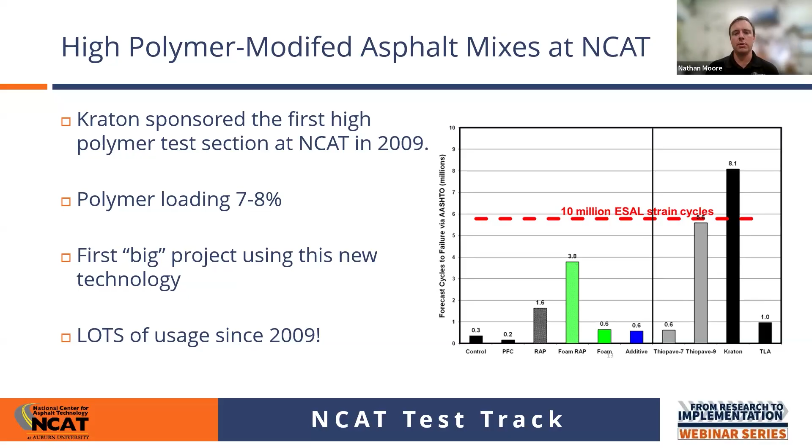We have used the high polymer modified mixes a ton since 2009. Sometimes in rehabilitation, other times in big group experiments to prevent bottom-up fatigue cracking and force top-down cracking. Other times just to build perpetual pavements for surface evaluation and all kinds of stuff. So really, the usage of this technology is pretty prevalent at this point, and not even just at NCAT, really across the country.

Some big lessons learned. What you'll find when you start using this material is watching your binder viscosity is critical. This stuff does tend to be stiffer than normal, so paying attention to that is really helpful. But the fact that the polymer loadings have come down just a little bit makes it easier to pump, and there's also a lot more technology that people who are smart about binder could tell you to help make it easier to pump.

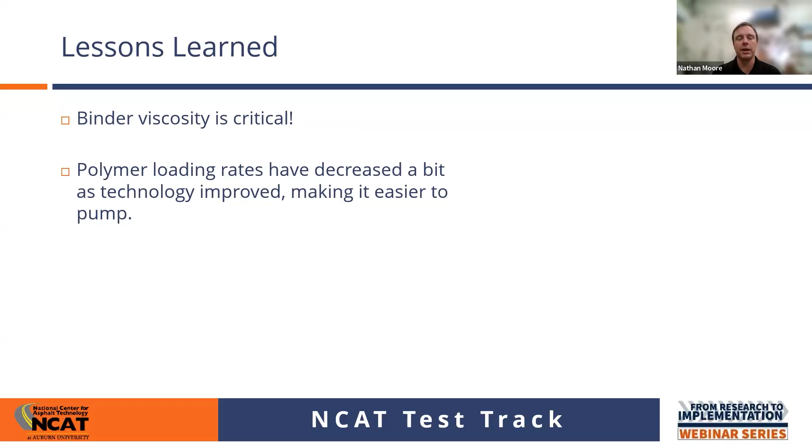Really, the big thing, though, in my opinion, one of the biggest lessons learned, and what we are trying to participate in the conversation to get the word out, is that these products significantly improve structural quality compared to conventional asphalt mixes. You don't need this stuff everywhere. But if you start to dig into the details about how these high polymer mixes work and how they impact structural coefficients or ME transfer functions, it's just quite remarkable.

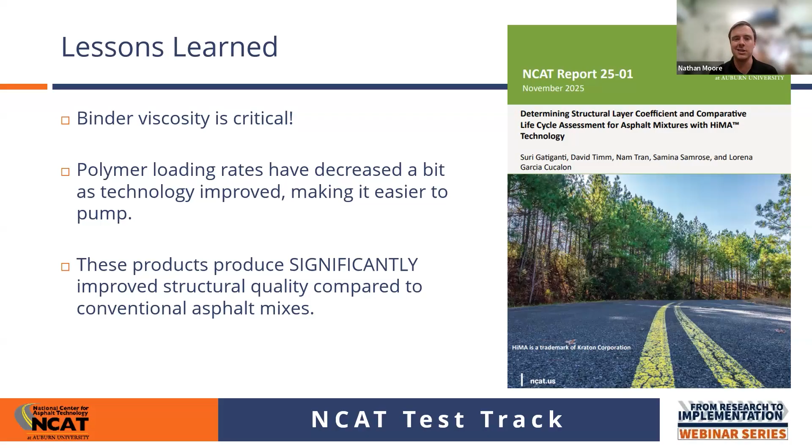This is just a screenshot of the NCAT report 25-01, where Suri Gatiganti, Dave Timm, and Nam Tran, and then one of their graduate students, Samina, wrote a report looking at structural layer coefficient recalibration using this product. So Nam's going to talk a lot more about this and some of the stuff that went into this report. So Nam, take it away. I'm going to turn it over to you.

Thank you very much for filling the space for me, because for some reason I couldn't find the button to share my screen. And again, thank you all very much for joining the webinar today. It is really a pleasure and also an honor to talk with Nathan. He has done a lot of work in the area of high polymer-modified asphalt.

In this presentation, I will focus on one thing, and the main question is how much better high polymer-modified asphalt performs than conventional dense-graded mix. What I'm going to do is summarize the field performance on several experiments at the test track, and then also look at the structural analysis for this experiment done by Dr. David Timm and his group.

In the slides that maybe we can share later on, we also have some information about the life cycle assessment done by Dr. Gatiganti. But for the limit of time today, I'm not going to present that part. And last but not least, I have an example of field implementation done by Oklahoma DOT based on the test results from the test track.

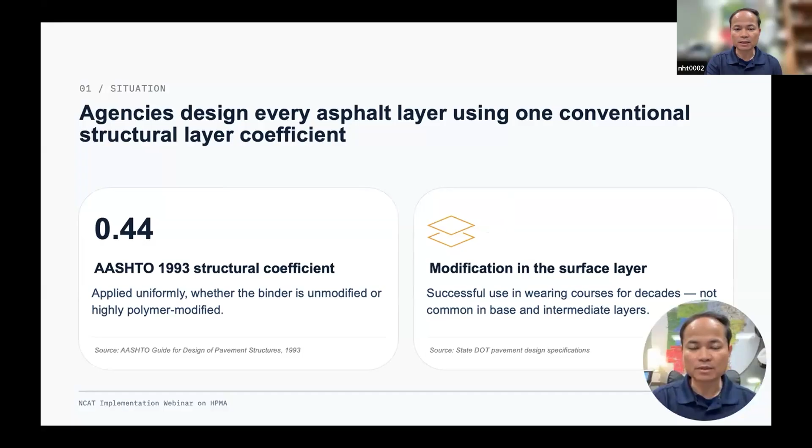However, it's not common to use polymer-modified asphalt in the base and intermediate layers. That really creates a gap between the current design practice and the actual field performance of that mix, and I'm going to talk more about that based on the experiment at the test track. So for the reason I stated before, the current pavement design practice does not fully take into account HPMA, the high polymer modified asphalt performance.

The NCAT track sections have shown better resistance to rutting and fatigue cracking than conventional control sections, and this was true even when the HPMA section was built thinner. But if you do structural analysis and look at the lab data, considering stiffness only, the stiffness of HPMA is not much different compared to conventional polymer modified asphalt.

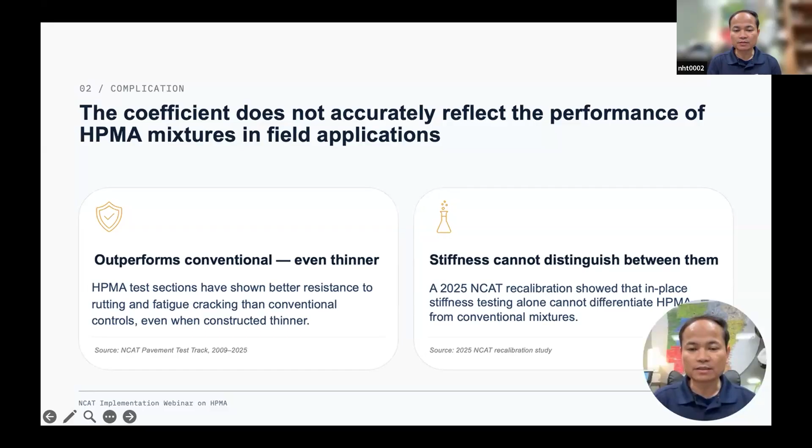So what we would like to highlight here is that if you would like to take credit for the HPMA, you probably need a calibrated design coefficient, or a way to take into account HPMA's resistance to cracking in the design procedure.

So all of that leads to the main question for this presentation: should HPMA mixtures receive a higher structural layer coefficient, or should that section be built thinner? And the answer is yes. If that answer is yes, what evidence do we have to support that recommendation?

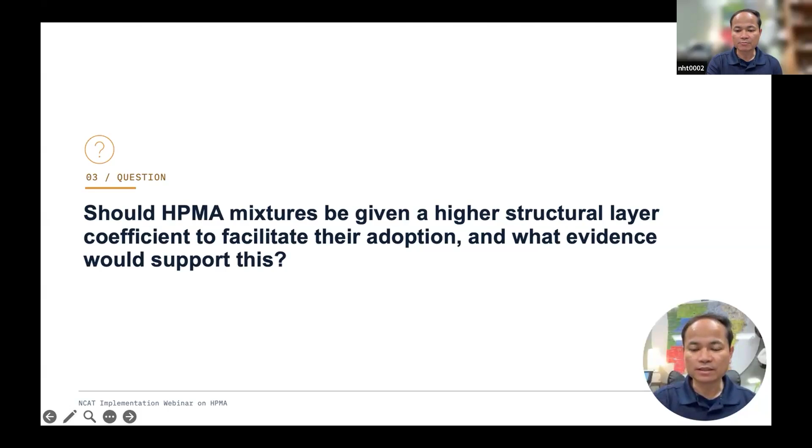The rest of the presentation will try to answer this question using the test track data, including the bending beam fatigue test in the lab, and we also have an example of implementation in the field for you.

So the short answer to the question earlier is yes, you can build the section thinner and apply a higher structural layer coefficient. The number I've shown here is that the layer coefficient typically used is maybe 0.44 in the 1993 pavement design guide, or in the case of Alabama DOT, they use 0.54 for the structural layer of conventional asphalt mixture.

Now, when we did all the analysis, published in the NCAT report 25-01 that Nathan mentioned earlier, we found that the layer coefficient for HPMA can be as high as 0.92, and the lowest number we found would be 0.75.

Now why do we have those two numbers? That is based on the conversion using 0.44 for conventional asphalt mixture, or 0.54 for conventional asphalt mixture. I'll talk about that later on.

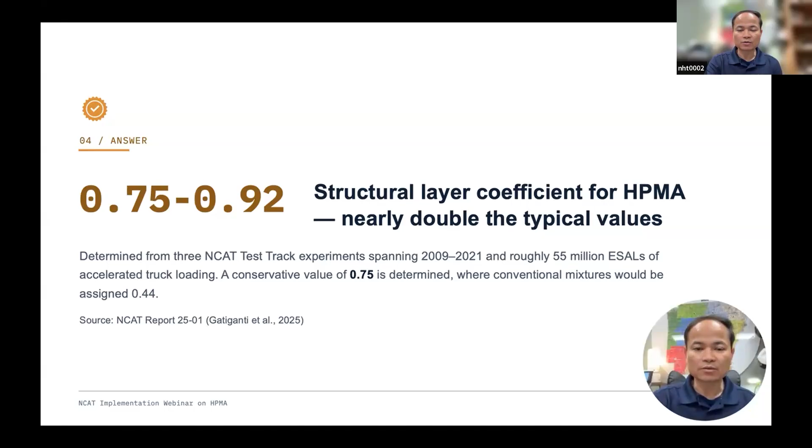One thing I would like to point out is that these values are based on several NCAT test track experiments, and the combined traffic for those experiments is about 55 million ESALs, starting from 2009 all the way to 2021.

So there are four research and implementation efforts that I have in this set of slides, but what I'm going to go through would be evidence number one: the field performance on the test track. The next one would be the structural analysis done by Dr. Timm and his group, and I will skip the life cycle assessment done by Dr. Gatiganti in that NCAT report 25-01.

And I'll talk about the implementation example in Oklahoma.

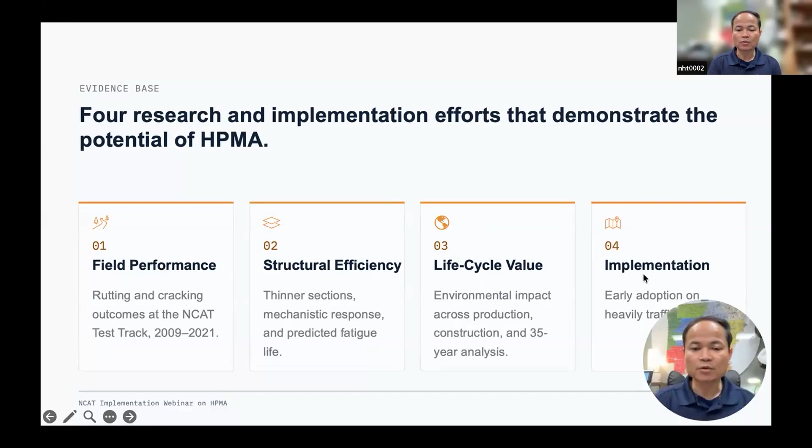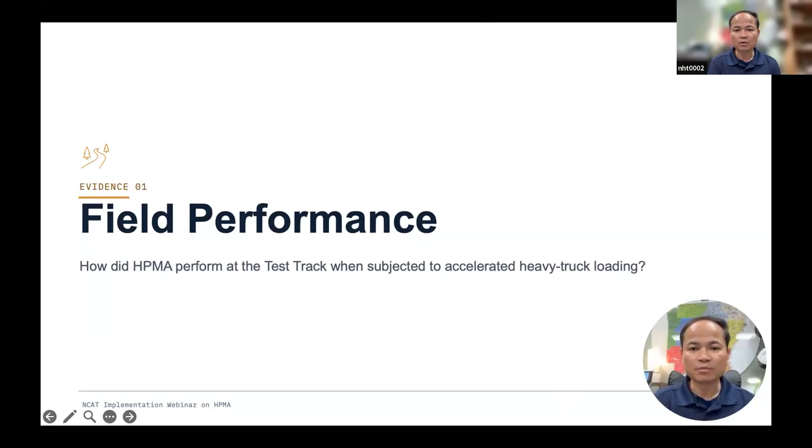Okay, so the first thing is really the performance at the test track. This part focuses on what happened when the HPMA section was trafficked under heavy truck loading at the NCAT test track in a hot climate. We understand that field performance is important because it links the mixture behavior and the actual pavement distress.

So the first experiment I'm going to present here is really section N7 and section S9, starting in the 2009 experiment, sponsored by Kraton at the time. You can see here section N7 was much thinner, 1.25 inches thinner than the control section with conventional polymer-modified asphalt, and also unmodified asphalt in the cross section.

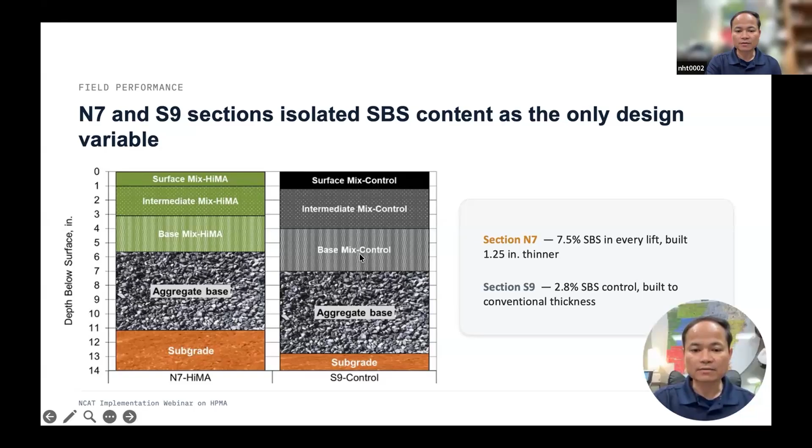Section S9 had 7 inches of asphalt, and section N7 only 5 and 3/4 inches of asphalt. Another difference is that section N7 used HPMA binder, which in this case had about 7.5% SBS throughout the cross section, while section S9 had a polymer modified surface and intermediate layer, but the base layer was unmodified asphalt. The base and subgrade were the same.

Now, the next experiment starts in 2010, following up on a 2006 Oklahoma DOT sponsored experiment to look at whether perpetual pavement actually exists, and what the value of perpetual pavement built in Oklahoma would be. We find there are two sections, N8 and N9: section N8 starts with 10 inches of asphalt on top of stabilized subgrade material in Oklahoma, on top of soft subgrade brought in from Oklahoma. Section N9 has 14 inches of asphalt, not shown here.

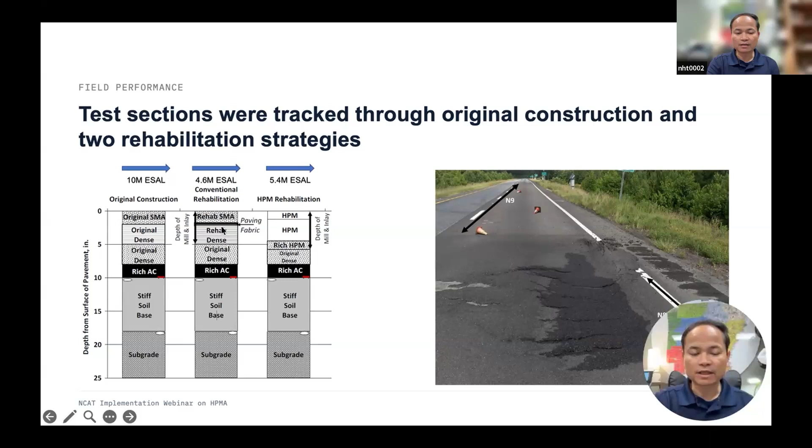Fast forward about 4.5 to 4.6 million ESALs and that section failed, so we had to replace it. The idea came up that since section N7 performed very well, maybe we could just replicate that cross section on top of N8. You can see in the picture how that section failed after it was rehabbed with a mill and inlay of 5 inches on top.

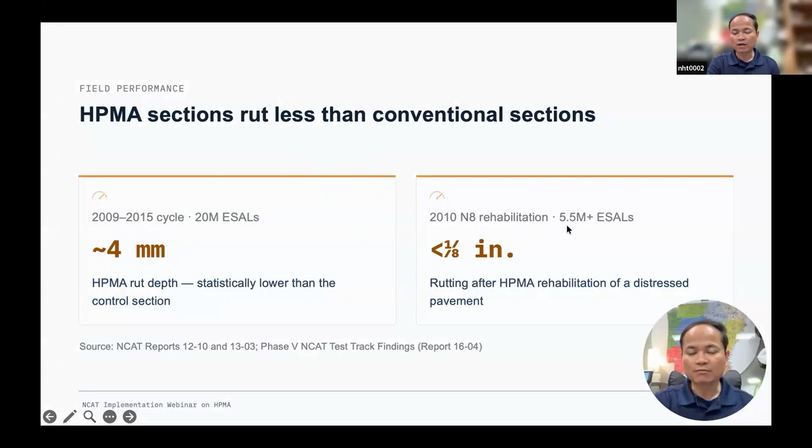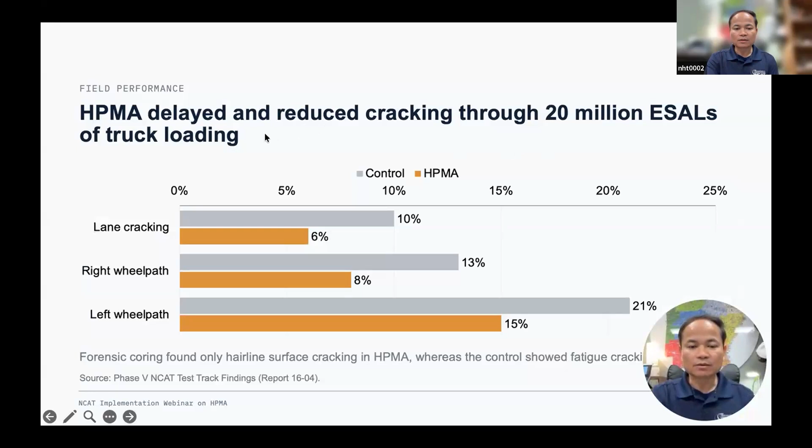Here's a quick summary of those two experiments on the test track. The first is N7 from 2009 to 2015, with very minimal rutting. Same with the rehabilitation of N8, up to about 5.5 to 5.6 million ESALs, also very minimal rutting, and the section still performed very well at the end of the research cycle at that time.

Now, fast forward, after the first research cycle, Kraton decided they would fund continued traffic, so both sections N7 and S9 would be trafficked up to 20 million ESALs of very heavy truck traffic.

What we found is, you can see here the gray bar is the control and the orange bar is the HPMA. In all the areas we monitored, the control section had more cracking.

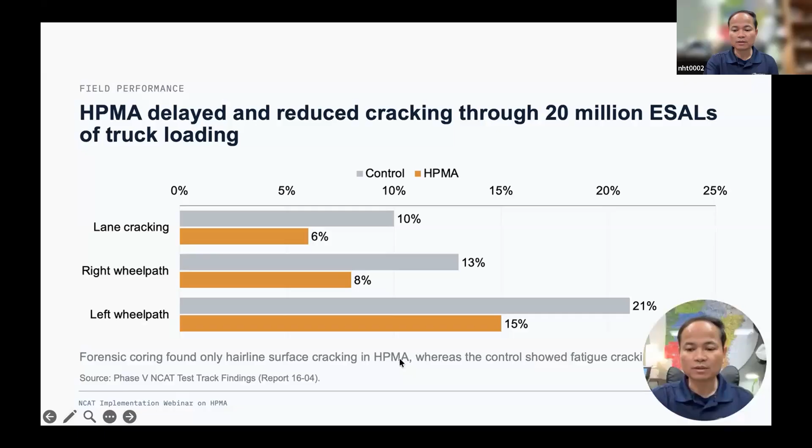At the end, we also cut cores to do a forensic study. We found section S9 had all bottom-up vertical cracking, but no bottom-up vertical cracking in section N7. It was concluded that section N7 can be a perpetual pavement with just 5 3/4 inches of asphalt using HPMA in that experiment.

Now for the N8 section, after we rehabbed it with HPMA, Dr. Timm did all the testing and conducted structural analysis with strain gauges and base pressure plates throughout the whole structure.

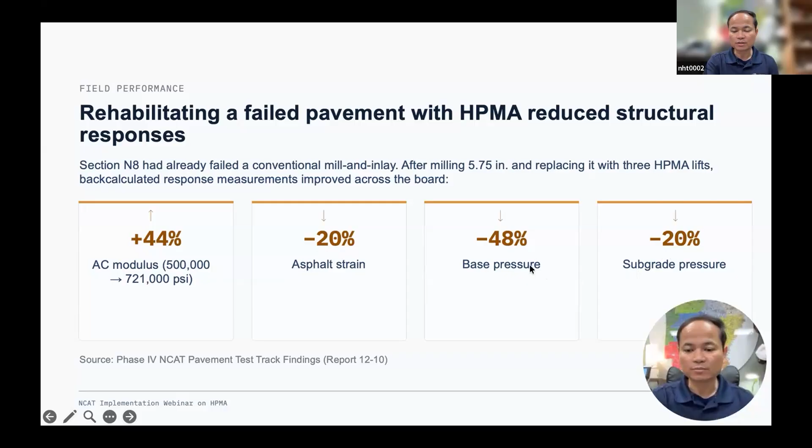You can see here the AC modulus, when you do the back calculation, increased by 40, 44, 45%, a significant increase. The asphalt strain at the bottom of the failed structure reduced by 20%, and all the pressure plates at the top of the base and top of subgrade reduced by 48 and 20%. So significant improvement in section N8.

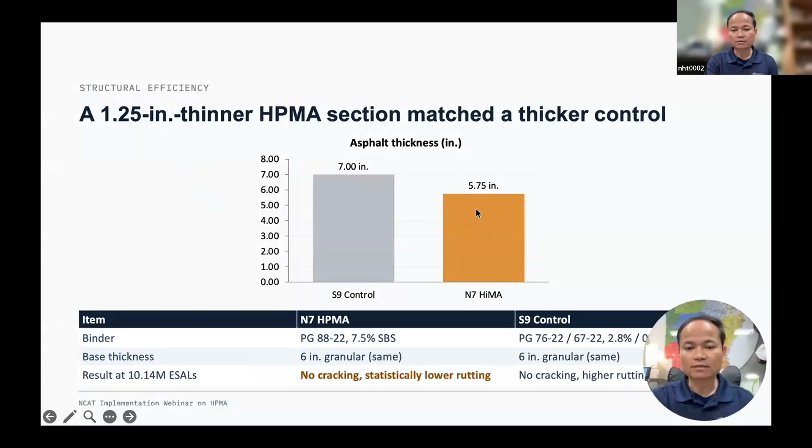The next thing is that Dr. Timm looked at all the data and did structural analysis to see how section N7 performed compared with section S9, the control. In the 2009 research cycle, section S9 had 7 inches of asphalt, and section N7 had 5 3/4 inches of asphalt, which was HPMA in that cross section.

What we found is that the cracking resistance, or the fatigue life, from the graph that Nathan showed earlier, the predicted fatigue life for the HPMA N7 section is 17 times greater than the predicted fatigue life for the S9 cross section.

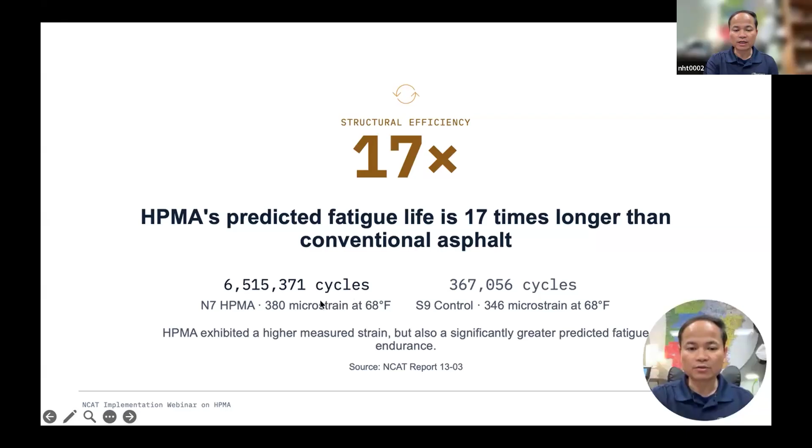The strain gauge placed at the bottom of the AC layer for N7 measured at 380 microstrain, and S9 measured at 346 microstrain. We used that microstrain with bending beam fatigue test results to predict the number of cycles, and it was 17 times greater for N7. Even though N7 carried higher microstrain at the bottom of the AC layer, it still lasted longer.

Fast forward to 2025, 2024, we went back to all the data from the test track experiment. One question was, based on the test track study, can we determine what the structural layer coefficient would be for HPMA mix?

The analysis showed that yes, the structural layer coefficient of the HPMA layer is almost double the typical value that has been used in pavement design.

The analysis here is based on what we call an equivalent cross-section. That means we determine what the fatigue life would be for the HPMA cross-section, and make sure that fatigue life is equivalent to the predicted fatigue life for a conventional section, in this case using regular conventional polymer-modified asphalt.

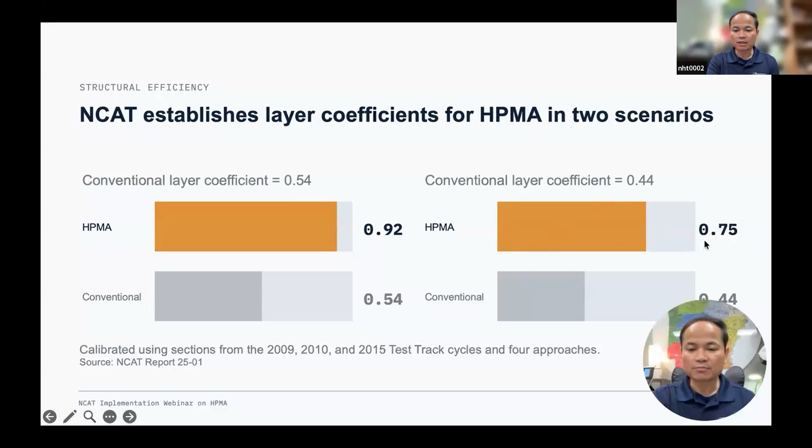So if the layer coefficient for conventional mix is 0.54, then the layer coefficient for HPMA will be 0.92. And if the state is using maybe the typical 0.44, in this case HPMA mixes would have the layer coefficient of 0.75.

The next one I'd like to talk about is based on the success of the rehabilitation in Section N8, Oklahoma DOT actually picked it up and put it into use for their field project. There's one section of I-40 in Caddo County, Oklahoma, and here's the history of rehab.

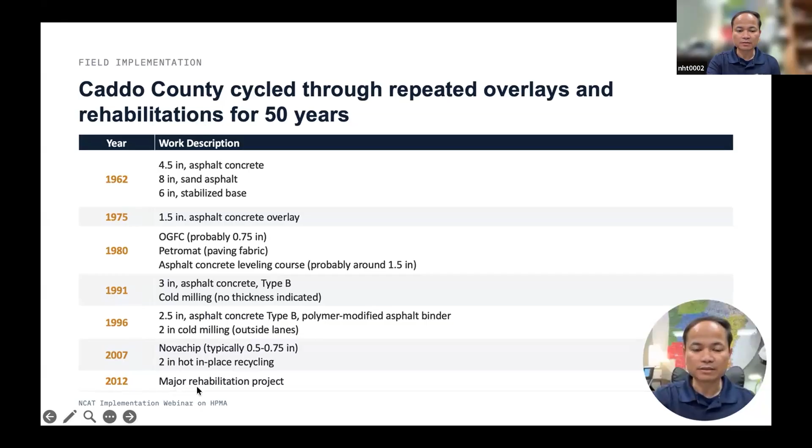That section was built in 1962. It had been going through a lot of rehabilitation, and kept failing until 2012, when Oklahoma DOT decided they were going to do a major rehabilitation so they don't have to repair it more.

Here is the design for that experiment. They came in and milled 5 inches of HMA, but they didn't mill the whole cross section - they left about 4.5 inches of asphalt concrete, the board that had a lot of cracking, in place.

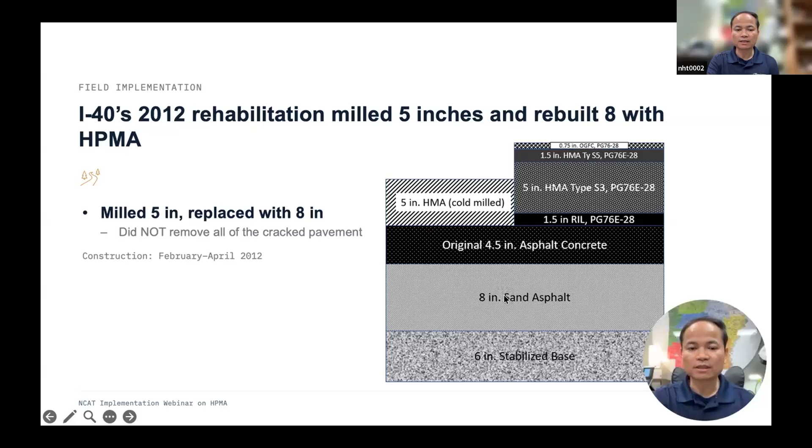On top of that, they put in 8 inches of HPMA mixture, very similar to the mix design that was placed at the test track. On top of that, they put an OGFC layer. The construction was done from February to April in 2012.

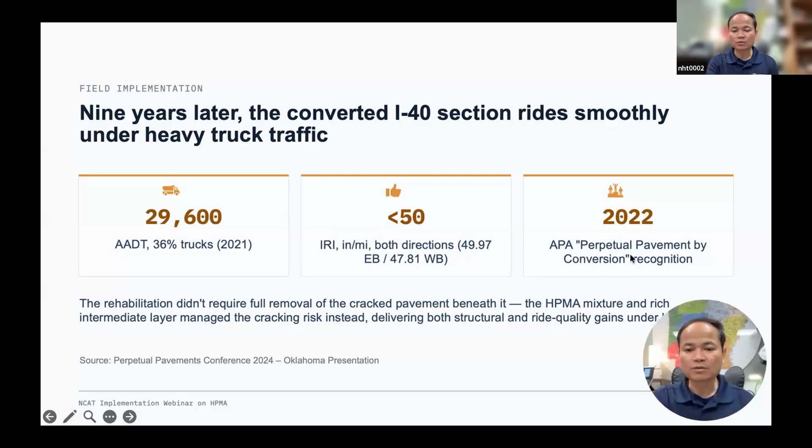Fast forward 9 years later, you can see there's a lot of truck traffic on the section up to 2021. The IRI for that section is still below 50 inches per mile with great performance. In 2022, the Asphalt Pavement Alliance gave the Perpetual Pavement Award for conversion.

You can see here several pictures of that section in 2021. There's no cracking, and you can see reflective cracking on the shoulder using the conventional mix, but that reflective cracking stopped when it went into the

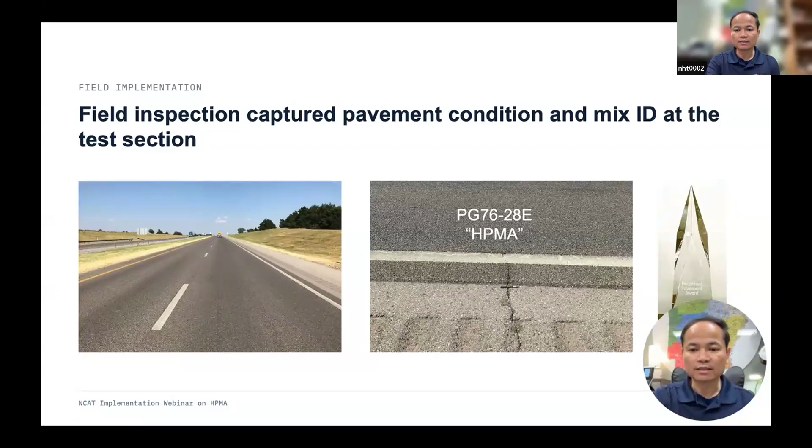HPMA mix. This one in this case is PG76-28E, and next to that is the Perpetual Pavement Award presented by APA.

So this will be the last slide for me, and this is our recommended adoption or implementation pathway for these technologies.

So in order for a state to justify the use of HPMA for structural pavement design, we believe you should adopt a higher layer coefficient. And if you're in a state using Pavement ME design, you need to do some fatigue cracking tests and include that cracking resistance into the Pavement ME design procedure.

And if you're using perpetual pavement design, you can do the same, and determine what we call the endurance limit when you design perpetual pavement.

So the second step would be that because the section you build with HPMA will be much thinner, if you're not very comfortable with that at the beginning, you can select one or two pilot projects, or talk with Nathan here and do some quick testing on the test track with accelerated pavement testing, and verify that the structural design would be sound and good for the state.

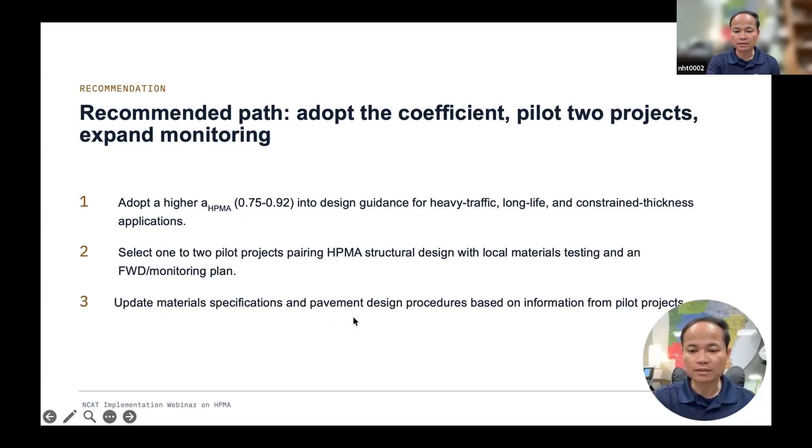I'll be talking a little bit more about the state of practice of using high polymer modified asphalt mixtures, mainly in the United States. What I'm going to present is an effort completed by the Asphalt Institute in collaboration with the Virginia Transportation Research Council, under a cooperative agreement that the Federal Highway Administration has with the University of Nevada, Reno, to which AI, VTRC, and NCAT act as subs, working on great topics to deploy innovative technology.

So it's a non-research contract, mainly focused on deployment of innovative technologies. To get us started, I want to make sure to note this effort has been completed under federal highway funding. I have to put that disclaimer that everything I'm going to speak about is the opinion of the research team, does not necessarily represent Federal Highway, and any proprietary product, any AASHTO or ASTM standards mentioned here are just for the sake of information.

I would like to acknowledge my co-authors, or the remaining of the research team on this project: Mr. David Johnson, my counterpart in the Rocky Mountain area as part of the Asphalt Institute; Dr. Ilker Boz and Dr. Stacey Diefenderfer, both from VTRC; Professor Elie Hajj from University of Nevada, Reno; and Mr. Tim Aschenbrener from Federal Highway.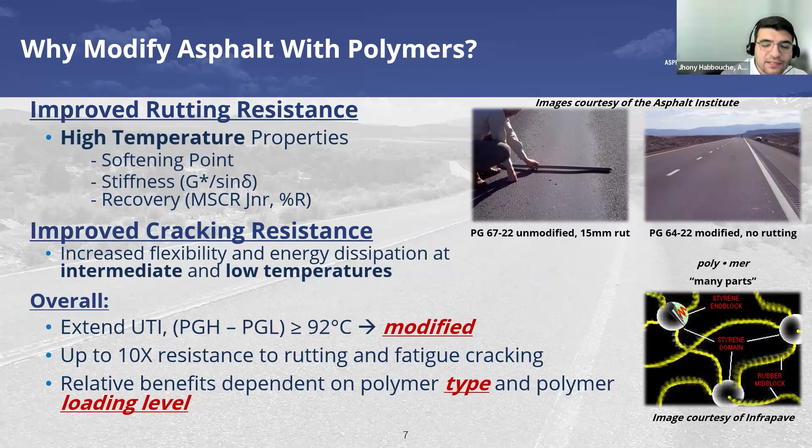So the main question is, we're gonna go back to basics. Why do we modify asphalt with polymers? And then the intention could spin into two routes. Either we're intending to improve rutting resistance, these properties at high temperature, or try and improve cracking resistance. So we're trying to increase that flexibility at intermediate and low temperature. All of that is dependent on the polymer type and the loading level of the polymer into the base binder.

A lot of research and practice has been for over 50 years on the use of polymer modified. One of them I would like to mention the work that was completed by the Asphalt Institute back in 2005 by their affiliate committee on quantifying the effects of polymer modified asphalt for reducing pavement distress. It was based on sections that had PMA, whether in their top, intermediate, or base layers, and they were able to prove an extension of at least 10 to 15% in performance life when these are used properly.

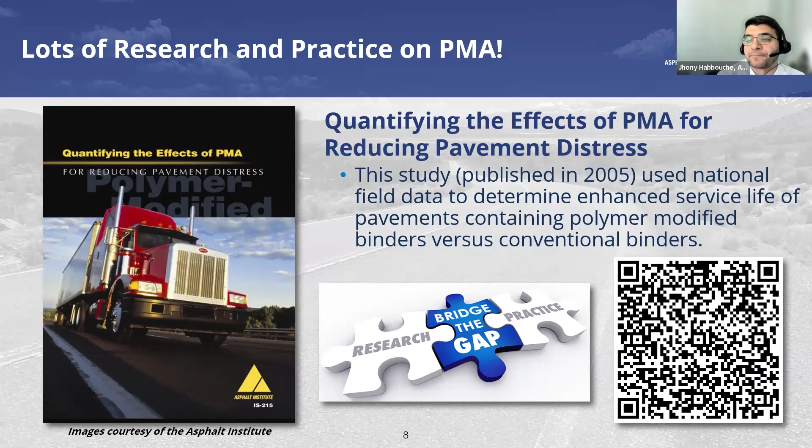Now, the question becomes, what makes an asphalt binder a high polymer? And that's a very tricky question because it could be answered from several perspectives. First of all, polymer type makes a huge difference. Second, the polymer content also is a key factor here. And if we compare our typical polymer modified asphalt binders, these are the conventional ones that we use on a daily basis. These typically are modified with 3 plus or minus 0.5% polymer.

When we start talking about high polymer modified asphalt, these typically involve about 5, 6, even 7 percent polymer. Like at the beginning, what Nam was talking about, the HiMA sections, they involved HiMA binder that had about 7% of Kraton's SBS polymer there. I want to emphasize, and I'm going to re-mention that towards the end of the presentation, the definition of high polymer is not and should not be based on polymer content, but this is one of the features that could direct towards characterizing a binder by calling it a high polymer.

And the final properties of the resultant binder, the base binder with the polymer, is really dependent on the polymer loading. You'll see you will have an asphalt continuous behavior up to a polymer content of 3%, and that's where the conventional PMA is. You will have a co-continuous behavior between your base binder and your polymer. And then at the end, once we hit that 5, 6, or 7% polymer content or loading, that becomes a polymer continuous behavior in the resultant binder.

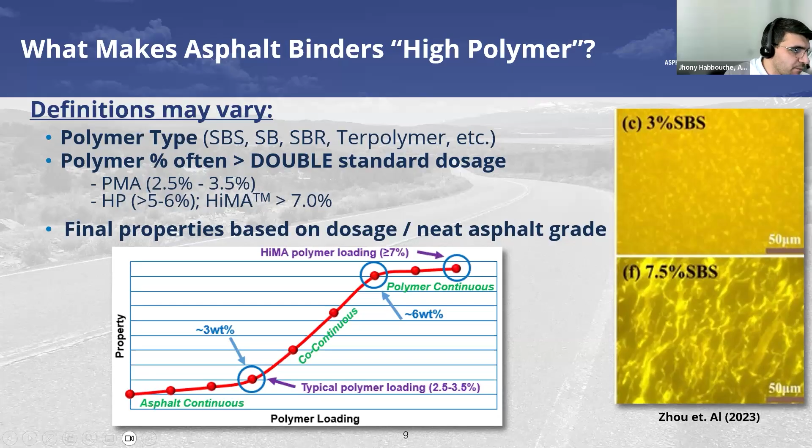So what we were trying to achieve in this project, there's been a lot of literature, a lot of work has been done by a lot of organizations, including NCAT, including UNR, and many others, even TTI. The intention here is to conduct a gap analysis. This has been in use since 2009. Nam gave an idea about that in the first sections that were paved on the NCAT test track. Now it's time to take that step back and conduct that gap analysis and try to identify some limitations, gaps, some improvements that could be done, maybe needs.

And then we were able to perform that through what we call a SWOT analysis. So the S stands for strengths, the W for weakness, the O for opportunities, and the T for threats. And for us to have a robust SWOT analysis, we wanted to get that input from states, mainly state DOTs that have used this technology a lot, especially recently, have put it in the field, may have some field data and have a lot of experience. So we can build that based on that input.

And I want to mention that also this was conducted to complement the work that was done under Federal Highway Every Day Counts TOPS, which is the thin overlay pavement solution. And I know during that, NCAT, under leadership of Dr. Adriana Vargas of NCAT, and Mr. Jim Musselman, formerly of NCAT, currently of Florida DOT, did a detailed case study about Florida, since during that time, Florida was the lead state on using high polymer modified mix, with their HP mixtures approaching about 5% of their paving program.

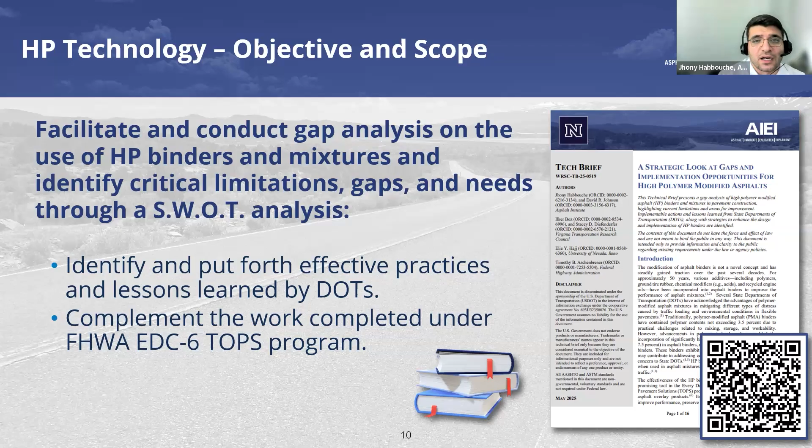So we wanted to complement that by going to different states, different climatic conditions, different needs, different materials being used, and so on. So you'll see QR codes in that presentation. You can access that tech brief. It's 16 pages that details a lot of the outcomes of this gap analysis.

Back during my tenure at the University of Nevada, Reno, we led a research effort for Florida Department of Transportation, trying to give them guidance on what structural layer coefficient they should adopt for HiMA mixes. It turned out to be 0.54 compared to 0.44 of their conventional PMA. This was performed taking into consideration several material characteristics, aggregate and binder, multiple distresses, various pavement structures, and done based on mechanistic empirical simulation.

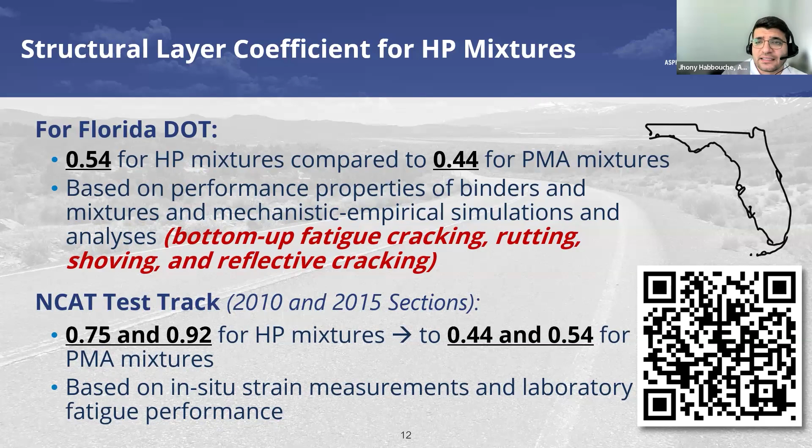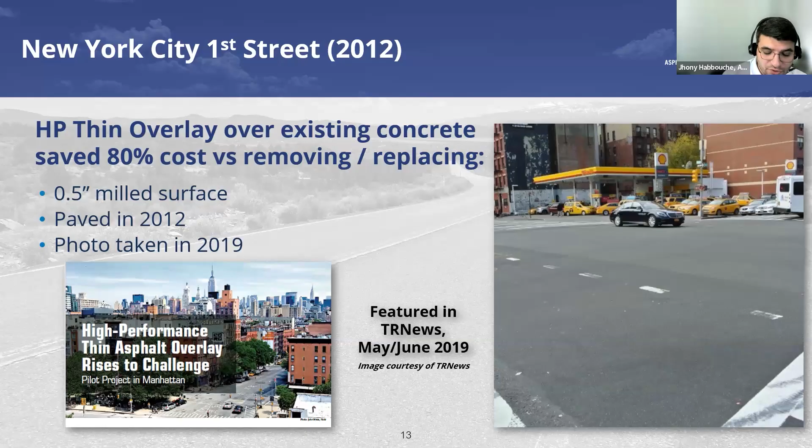I'm not going to cover the NCAT test track. Nam covered that in detail. National ones: New York City, First Street in 2012. HP was used there over existing concrete. There was a photo published in 2019 by TR News that showcased the section being in excellent condition.

Oklahoma, I know Nam mentioned that. So they took the success that happened on the NCAT test track, and then they developed what they call the rich intermediate layer that's being used very frequently with HP binder in Oklahoma.

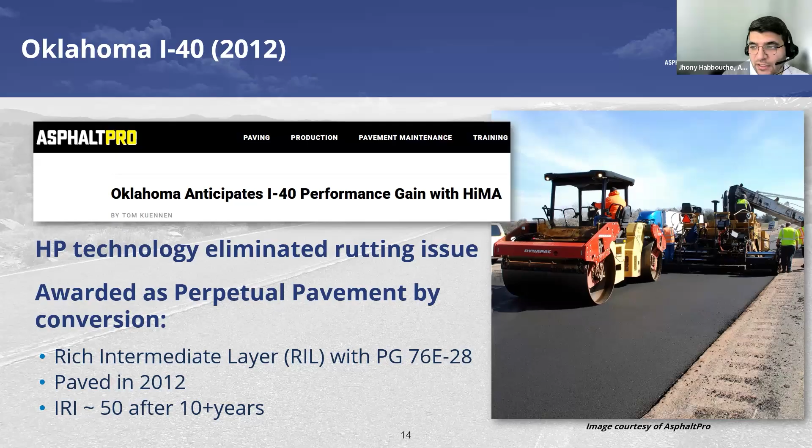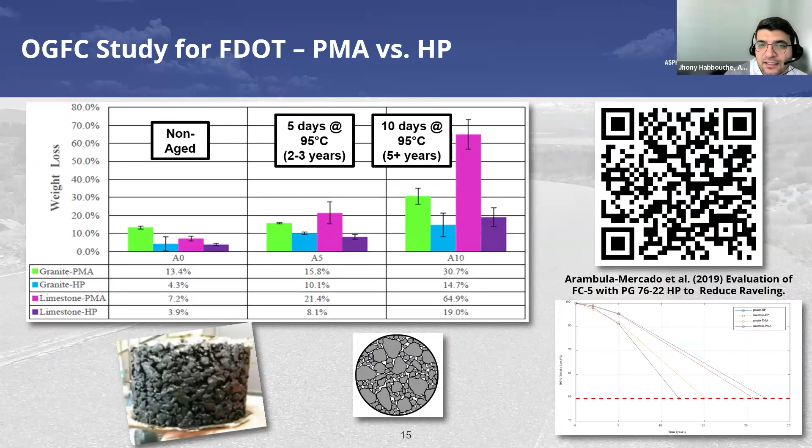Also, Florida showed interest in potentially doing a binder swap for their open-graded friction course mixtures. And they noticed with that binder swap between PMA and HP, they can get about 7 to 8 years extension in the performance life of these types of mixes. And again, QR codes, if you're interested in the details of these studies, you can just scan these QR codes and get the reports, download them, and read them.

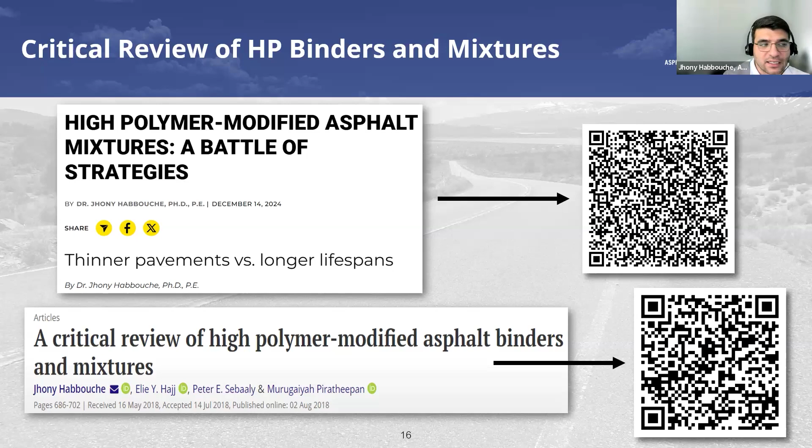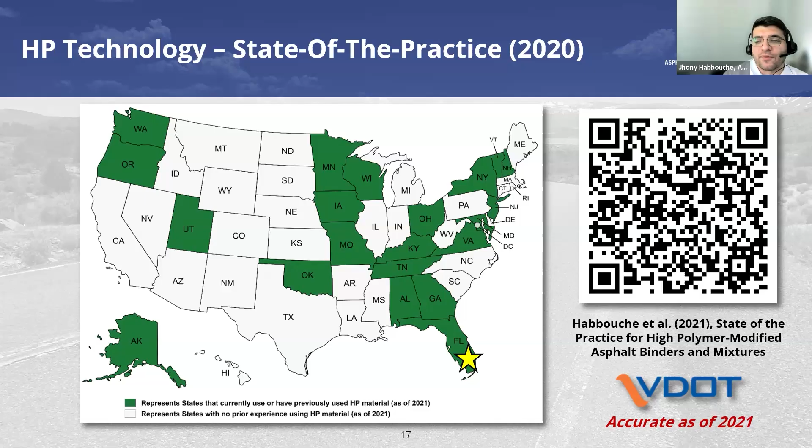Now, the main question is the state of practice. Back in 2021, during my tenure with Virginia DOT, we surveyed all state DOTs trying to see which ones have experience using this type of material. And I want to emphasize these are state DOTs and not local agencies. During that time, we were able to identify 17 states that either have them in the spec or have any type of experience using this type of material. Well, we repeated this as part of this effort in 2025, and that number of 17 went up to 31.

And you'll see various colors, depending on whether the states refer to HP using AASHTO M320 or AASHTO M332. So we've seen interest and a continuous increase. We're at about 31 states. If we go to 2026, probably we'll get 2 or 3 more. Colorado has done a trial. Montana, which is here, has done a trial. Arkansas has done a trial, and Missouri is interested in one. So probably we'll pick up about 4 or 5 additional states by end of 2026.

And the states where you see yellow stars are the states that were considered leads based on the literature review, and that we met with and interviewed to gather input for the SWOT analysis. They were Utah, Oklahoma, Ohio, Virginia, and New Jersey.

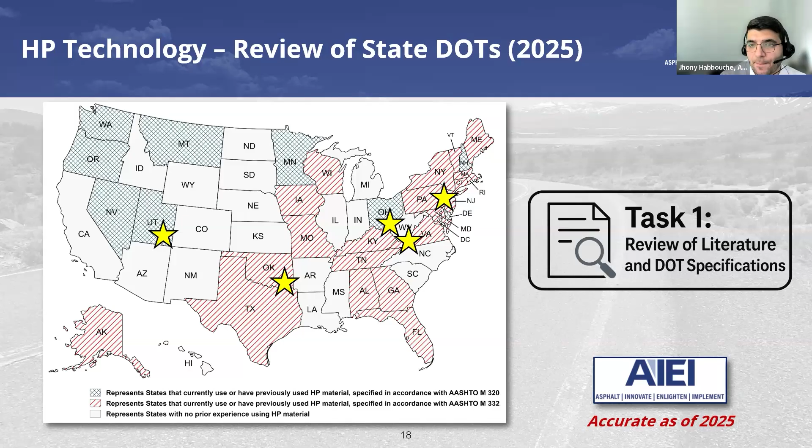So just to give you a little bit about specifications, I'm going to take Utah and Virginia as examples, starting with Virginia. Virginia uses M332 to specify their HP binder. They refer to it as PG 76E-28. They perform MSCR testing, with a requirement of Jnr maximum of 0.1 and percent recovery minimum of 90% at 76 degrees C. The way Virginia handles HP mixtures, they have their typical mix and just do a binder swap. They take their conventional PMA binder out, put their HP binder in, they pave, nothing else is changed.

So this is a way of doing HP mixtures by just binder swapping. Well, in the case of Utah, for example, first of all, they use an M320. Their PG is a 76-34. They only have requirements on their percent recovery, at 76 degrees C, minimum 90 percent, and then they have some requirements on additional parameters like delta TC.

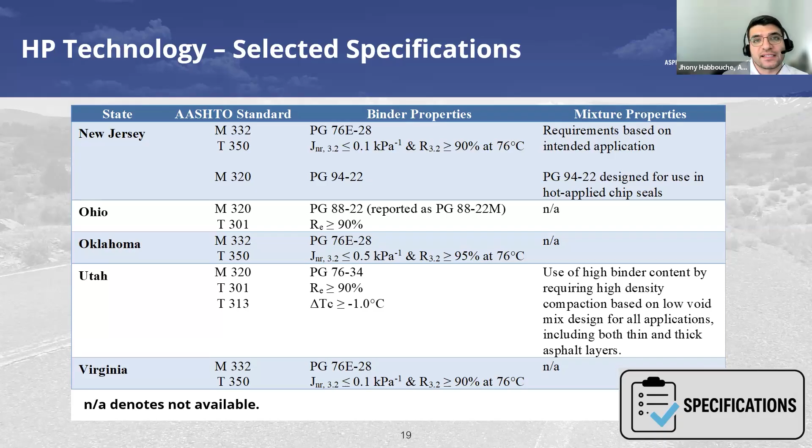But Utah doesn't stop here. You can achieve that binder with about 5% polymer, not necessarily the 6 and the 7 like Virginia. Virginia, for you to achieve that binder, you need at least 7, 7.5 polymer. Utah has more of a requirement on the mixture, so it's more of a system for Utah compared to just a binder swap for Virginia.

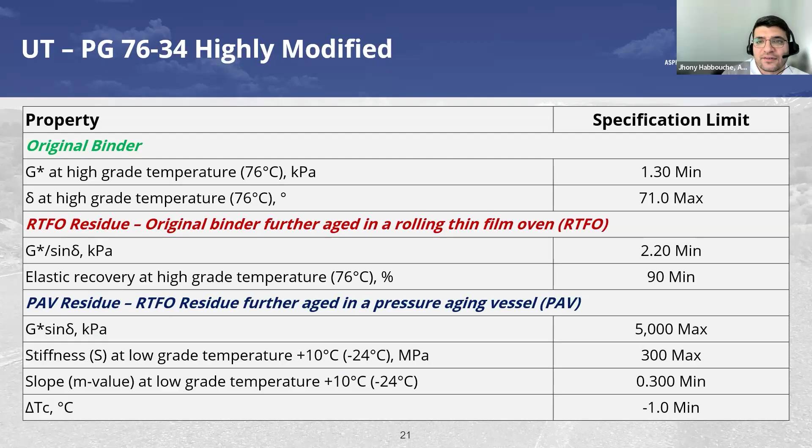Just to remind you, this is the specification for the binder in Utah. Nothing really. Again, I'm repeating myself here. That percent recovery, then everything else remains the same as typical PG grading following AASHTO M320. But as I mentioned, they do have a requirement on their mix specification. They do their design. You see, they're designing their mixtures down to about 1% air void.

Their requirements on the volumetric properties are different when we start talking about VMA, VFA, even the binder content, and then they do add performance, especially at high temperature. I want to mention that the requirement on the Hamburg wheel tracking test, the HWTT, has recently been modified. This hasn't been updated in the slide yet, but I believe the 10 millimeter went down to 7, if I'm not mistaken. I need to go and pull the specification again.

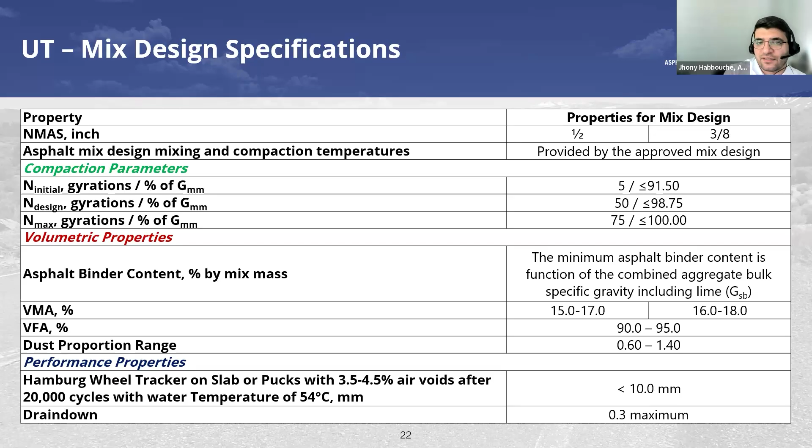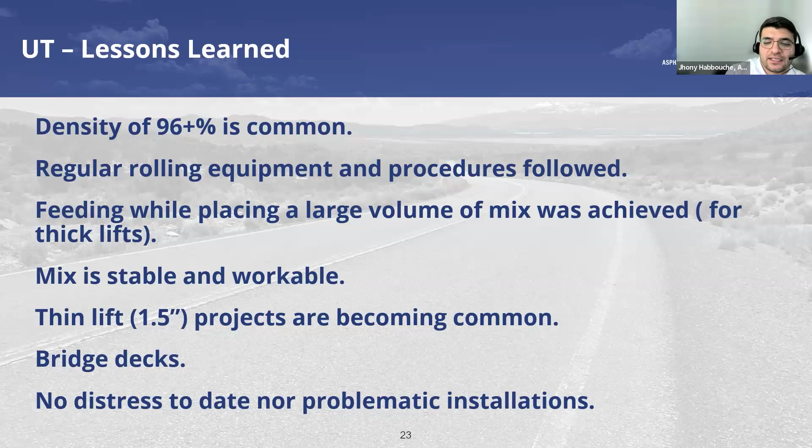Again, a lot of lessons learned. They were able to achieve density. It worked for them very well for thick lift. The mix was stable, workable, worked perfectly for them for thin lift, for bridge deck. And it has displayed excellent performance as of today. And moving into 2025 and 2026, their highly modified asphalt mixture, that system between the enhanced volumetrics and the HP binder, has totally replaced their SMA, with a lot of competitive pricing compared to typical mixture. So it has seen a lot of success.

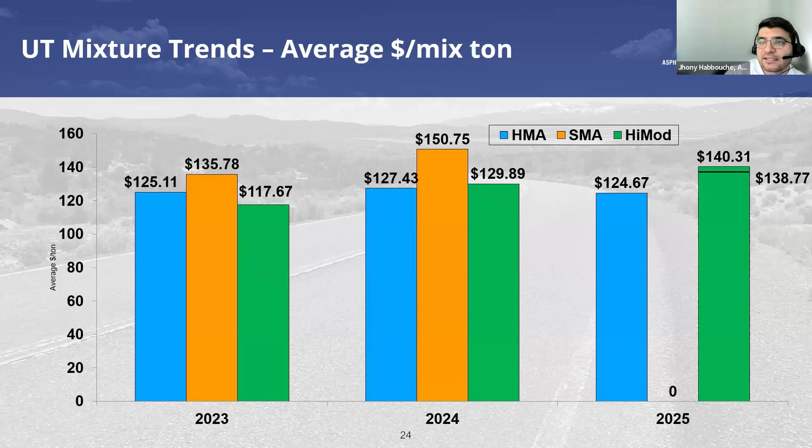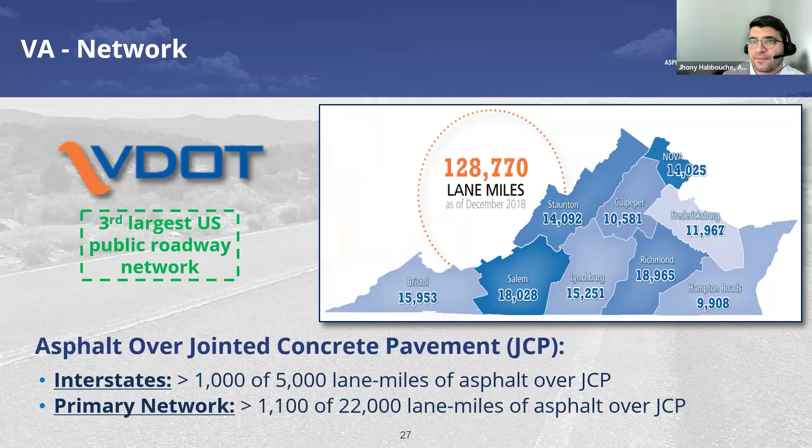Now I've got to move to the other case study, Virginia. In that case, again, they do binder swap. Virginia DOT maintains the third largest U.S. public roadway network. So all the roadways in the Commonwealth of Virginia, except the roads of 2 counties. And ironically, these 2 counties follow VDOT specs. And if you go on the I-95 or the I-495, these are jointed concrete pavements built back in the 60s and the 50s. So reflective cracking is a big concern for Virginia.

So that's when they said, well, maybe we need to invest in that technology and see if we can delay. You will never be able to stop reflective cracking just by laying down asphalt on top, but we can delay that reflective cracking. So using HP, some field data up to 8 years have shown a 34% extension in performance life compared to their PMA. You may say these numbers are small. I just want to remind you, these are 2-inch overlays on top of jointed concrete pavements, and reflective cracking is the critical distress here. And by rule of thumb, reflective cracking will transfer up to the top by about 1 inch per year. So we've got to keep that in mind.

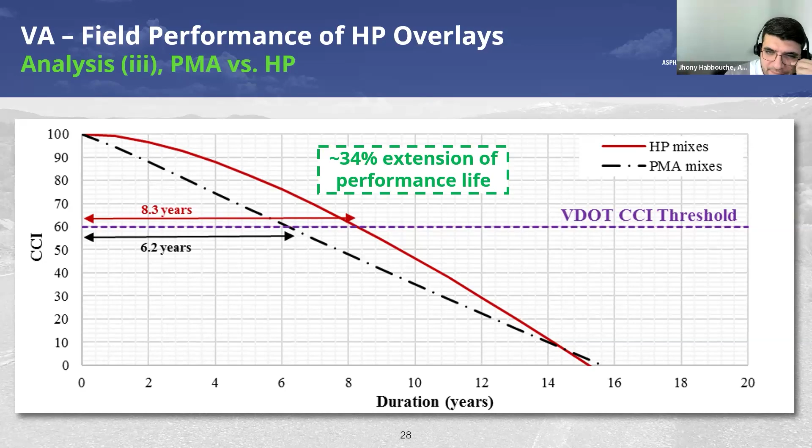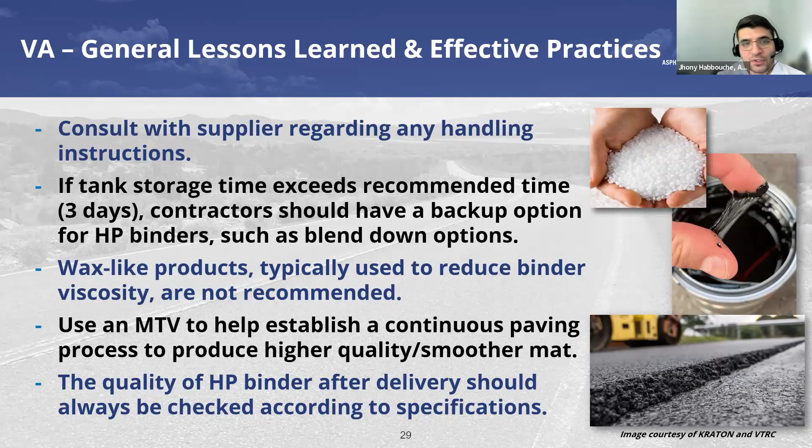Some general lessons, to echo what Nam said and what Nathan said at the beginning: always consult with the supplier regarding any handling instructions. During that time, when we interviewed the contractors, they mentioned the recommended time of 3 days in terms of tank storage. I know there has been a lot of improvement in binder formulation, and we're probably starting to see the number of days in the 2 digits at the moment. Again, contractors like to use a material transfer vehicle to ensure good paving, and they always check the quality of the asphalt binder from the tank at several time intervals, more frequently than with conventional binders.

The last portion of what I want to talk about: again, if you are interested in learning more about each and every state, these QR codes are yours. For each one, we developed about a 15 to 17 page document that showcases everything that went into that state. You can learn more about their intention in using that technology, some of the tonnage, the prices, some of the field performance, ongoing research, and some lessons learned. These are in detail, but for the sake of time, we're not going to go into that at the moment.

However, what I want to talk about briefly is the SWOT analysis, starting with the strengths. When we developed that, we wanted to split these between people-oriented factors and technology-oriented factors.

When it comes to people, the support that we get from Federal Highway, this project was a simple example of that, and many others like the EDC6 TOPS that NCAT has led for Florida recently. State DOTs, a lot of interest. We've seen 17 states becoming 31, and industry and research community, we've seen many of these involved and interested in researching more and even implementing this technology.

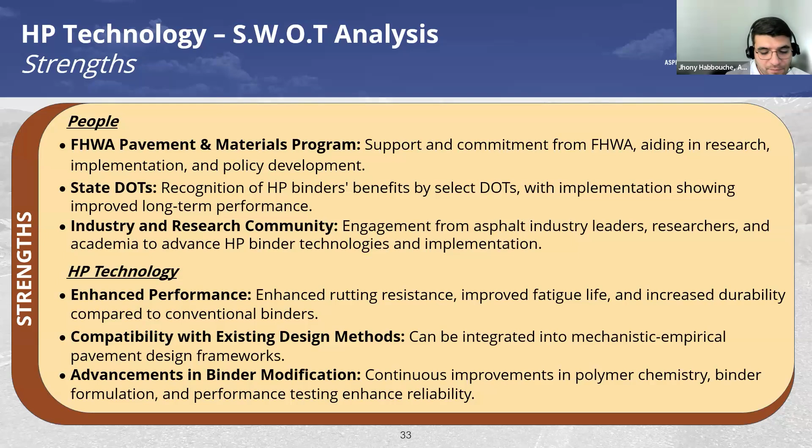Technology itself, no brainer. There's plenty of literature that showcases the enhanced performance with using that. Compatibility with the existing design method. Virginia is a simple example of that with the SWAP binder, and a lot of advancement in binder modification that makes this technology more available to all states and can be achieved by numerous suppliers.

Now, there's nothing wrong in identifying some of the weaknesses that we try to work on and turn these into strengths. Variability and expertise. Of course, not all state DOTs and not all personnel have the same expertise. So that comes with exposure and more training, as well as with the limited contractor familiarity. For the HP technology, lack of standardized definition. I just showed you in that table 5 different specs or 5 different ways of specifying HP. So we're going to be aware, and we're going to talk about nomenclature in a second. That's also a big hurdle. We want to make sure when we use a given acronym, we're using that correctly.

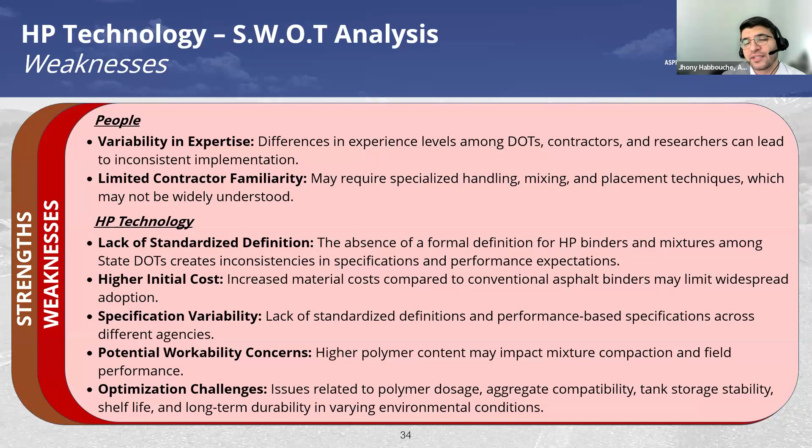Higher initial costs, we'll take an initial look. It's a weakness, but shouldn't be a problem because of the increase in performance life or increase in structural capacity. So there are things that can compensate for that. Specification variability, we talked about that. Potential workability concern, just given the relatively higher viscosity of that binder, and some optimization challenges depending on the availability of the polymer, dosage, and so on.

I want to cover the nomenclature. We hear a lot of these acronyms, and standardizing or just making sure we're using the right acronym and the right setup is very important. So I'm going to start from the bottom right and then go all the way up to the top left. HiMod, that's the system recommended by UDOT. So it's a big H, small i, big MOD. So that's HiMod, that's the definition. If I go to the middle, HP is a more non-proprietary general nomenclature that has been adopted by the Asphalt Institute, Florida DOT, Virginia DOT, many other state DOTs.

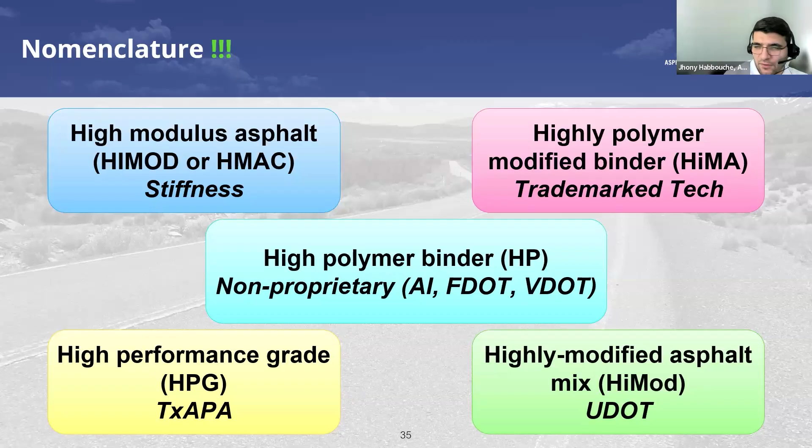If I go to the top right, we're talking about a highly polymer modified binder, HiMA. That's a trademarked tech by Kraton Polymers, which falls under HP, but it requires the use of their specific polymer structure. If you go down, now we start seeing the high performance grade, HPG, used in states like Texas by TxAPA. And then at the top, we see the big HIMOD, all capital letters, or the HMAC, and that's the system that was developed back in France, and that's more of a high modulus asphalt stiffness. It does not fall under HP. So nomenclature is very important in that case.

Again, you'll see an increase in initial costs for these states, but all of them were able to justify an extension in performance life, a factor to compensate for that increase in the initial cost.

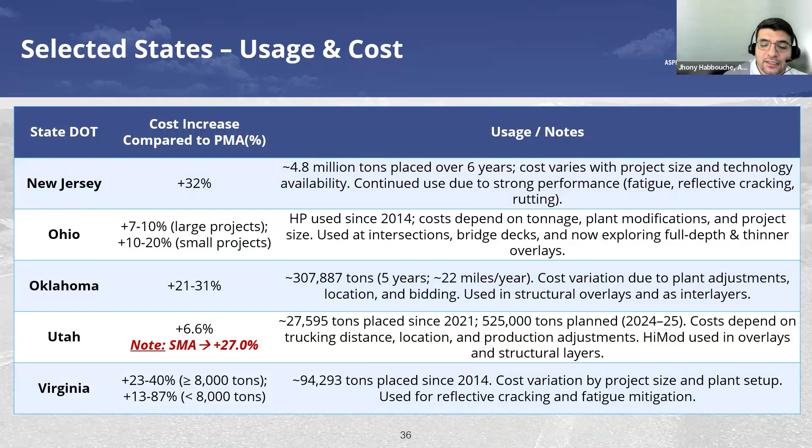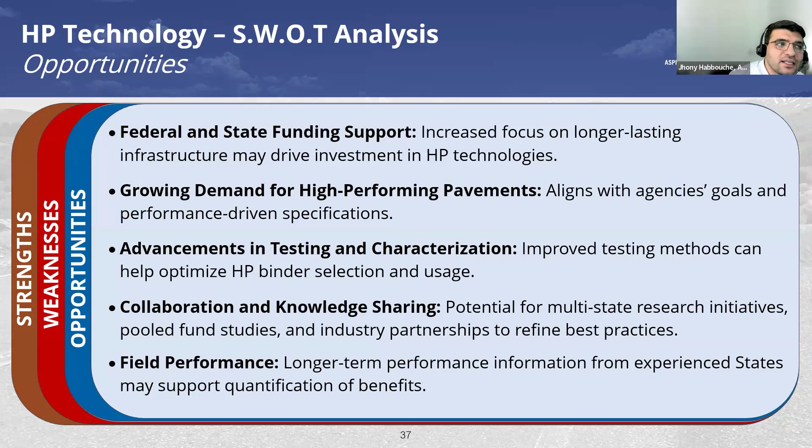To finish up, a few opportunities: federal and state funding support. For example, this cooperative agreement is a simple example. Growing demand for high-performing pavement. Obviously, we're getting more population, more loads, higher magnitude on the pavement. So we need our pavements to perform better and better. Advancement in testing and characterization, which helps us capture the improvement in this material, collaboration, knowledge sharing, and then finally field performance. Some of these state DOTs have shown that.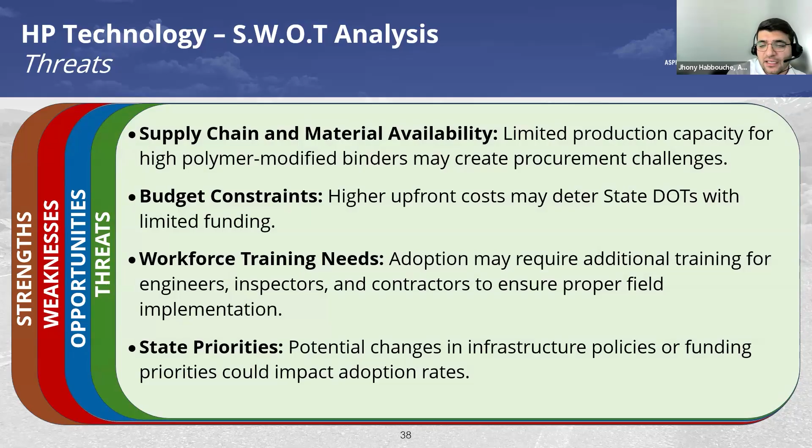So with that, I'll give it back to Nathan. Just remember, it's a performance-based approach. It's application-specific use. What happened in a given state, state X, does not have to happen in state Y. We assess what we need, and then we orient the use of that technology towards that. Cost-benefit evaluation is very important, and a feedback loop. Do lab testing, trials, field data, come back, reassess, and then improve from there.

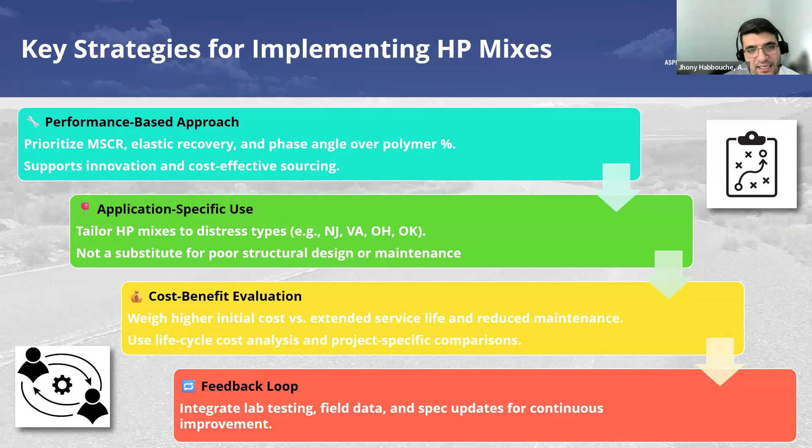So yeah, just a summary of recommendations here. Nam talked a lot about how using this type of material you can recalibrate structural layer coefficients using the AASHTO 93 guide. Really conservatively, we've found that in just a straight binder swap, you can get the structural coefficients 70% higher than conventional asphalt mixes.

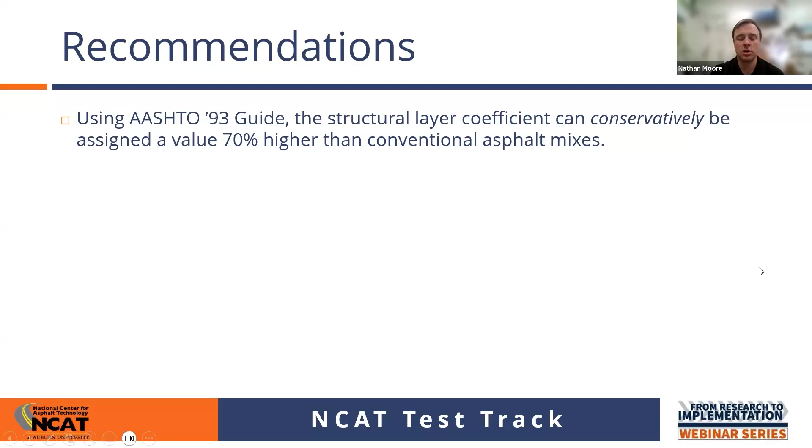I would say one of the biggest recommendations here is sometimes we talk about research that has just barely crossed the threshold into ready for implementation. I don't think that this technology would fit in that category. This stuff is ready to go. Jhony talked about 30-something states have at least trialed this type of technology.

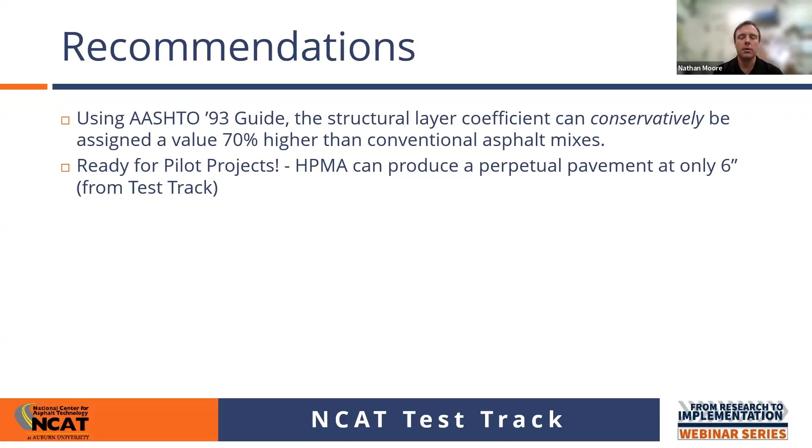We have seen from the test track that these high polymer mixes can produce perpetual pavements at 6 inches, maybe I think 5 3/4. I'm not saying you have to be that aggressive, but I do think the technology is there. This is a tool that's ready to be used, and I'm glad that it's getting kind of the airtime that it is.

I thought that this was a great point that Nam made that we've done this on the track, and then also Oklahoma has done this in the field, that you can use these mixes without doing full remove and replace of pavements in need of rehabilitation. That is really big. If you can limit the amount of excavation that you have to do, even underneath failed asphalt pavements down into the base, that's significant cost savings.

You don't run so much risk of having a big rain event move in and flood the work site, and then you have water trapped under there. That's a huge win, being able to use this technology without having to do full remove and replace.

So that's great. If you listen to Jhony talk about this stuff, he talks about definitions in every single one of his presentations. And if somebody is going to talk about something that much, it means it's important. Definitions vary, nomenclature varies, and it is important that we are clear about what we're talking about.

Some states have rebranded this for their own specifications, and that's fine. And obviously, there are some trademark names out there that are kind of synonymous in our minds with this technology. But there's also non-proprietary ways of describing this technology.

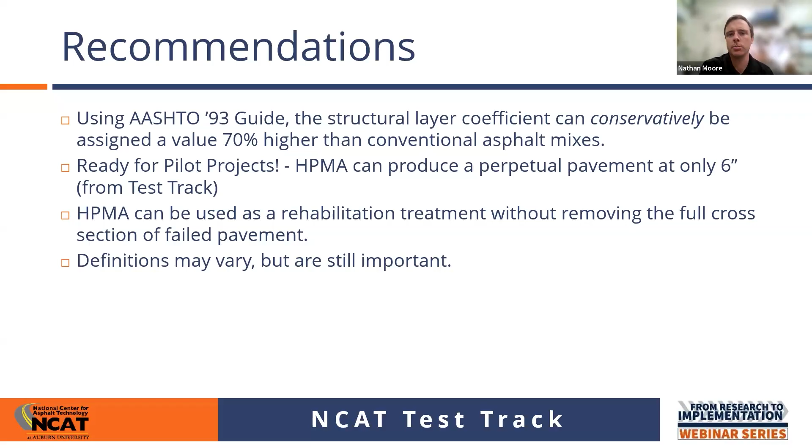But also binder specs are different, and so that doesn't really fall under definitions. But as you start looking across the states, there's different ways of specifying whether you're using PG grading or MSCR grading. And it's really important that we pay attention to those details. We talked about this already, but over 30 states have already gained experience with HP binders. Some have already put it in their specifications. Others are doing trial projects.

I'm on the road here in Arkansas, and they've recently done a project here and have found great success with it. And so I like to think of technologies that are off the shelf ready. This doesn't require too much to go ahead and start producing. I saw there was a question in the chat, which we'll get to, about plant modifications that need to be made. I think that's a great question. But for the most part, this stuff is ready to go.

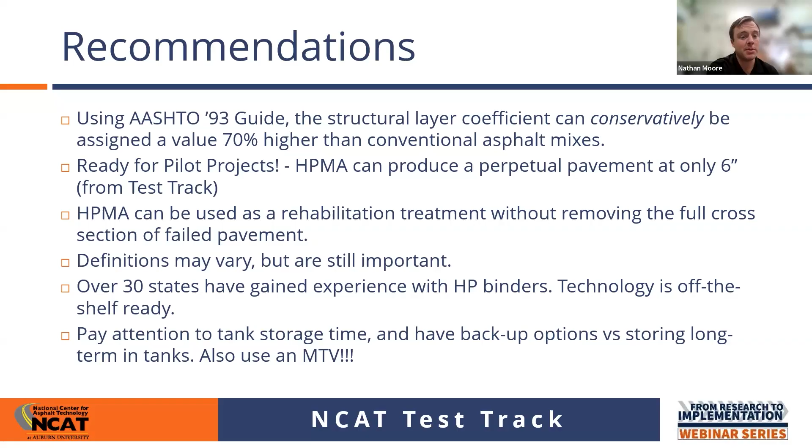Pay attention to storage, tank storage time. We'll talk about plant modifications here in a minute, and having backup options versus storing long term in the tanks. And sometimes simple is best, right? Using just basic best practices like material transfer vehicles, that's the way to go.

And then the last point, I know it's buried here at the bottom of the screen, but I don't want to lose sight of this. In my opinion, this is the biggest win for agencies who are considering adopting this technology. Increase in initial costs. Yes, that will happen. Jhony showed a summary of that, looking about maybe 20%. I didn't get a quick average, but that seemed about right, somewhere in that range.

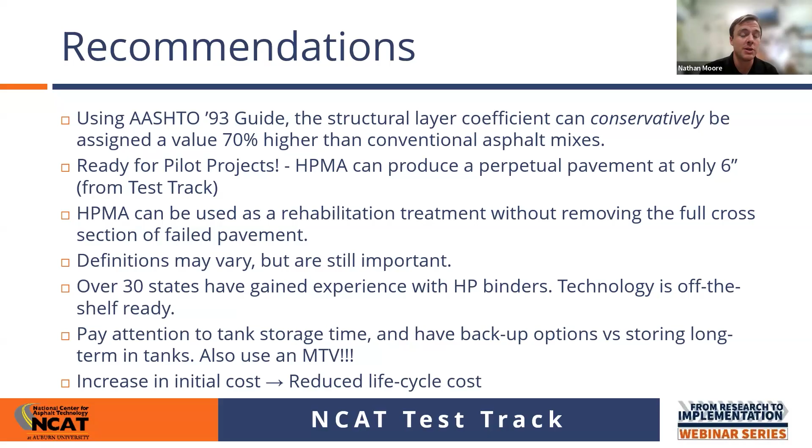But this will equal reduced life cycle costs. Or it could even be offset by change orders, or value engineering propositions that are added in, because of the opportunity to reduce thicknesses or swap mix types. And there's a famous story going around about what's happened to SMA mixes in Utah, for example. But keep this in mind. It may cost a little bit more up front, but these pavements can become perpetual pavements, and we saw one of them got a perpetual pavement by conversion award.